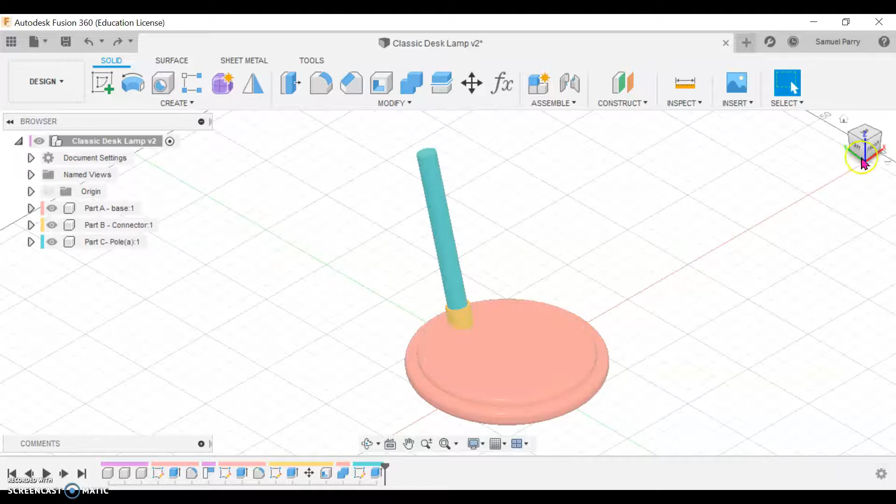So I'm just going to quickly give this a bit of a spin, so you can see where we are up to and what you should have up to now.

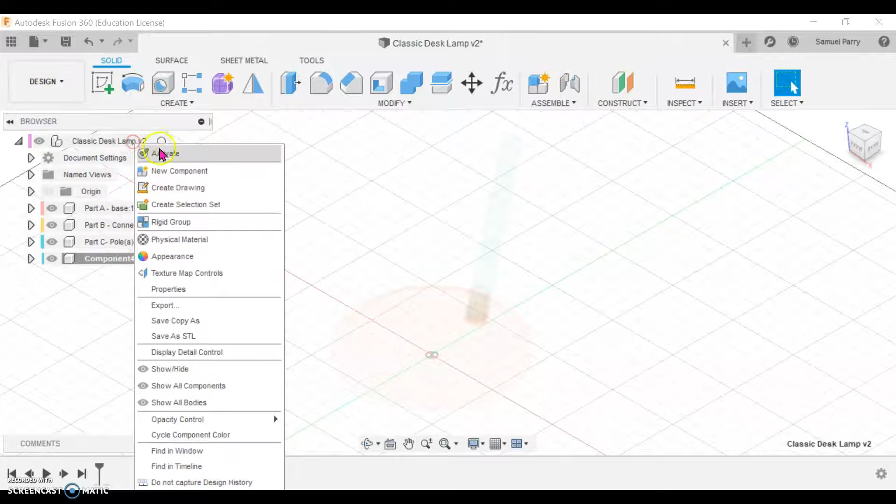And the first thing we're going to do is simply just map out a few more components ready. It's really important that you activate this top part, this top component, which as you can see from this icon is the full assembly of all parts. And then we're going to right click and say new component. We're going to do that again a few times and just map out the next few components.

You can of course do this at the very start before you draw anything, get them all mapped out, but sometimes it's quite nice just to build a few and then map out the next one. So I'm going to double click here now. We'll call this part D, pole B. Just misspelled that, let's go again. Pole B.

This one I'm going to call part E, and that will be the metal bracket, we'll call that. And then part F, we'll call that the lampshade.

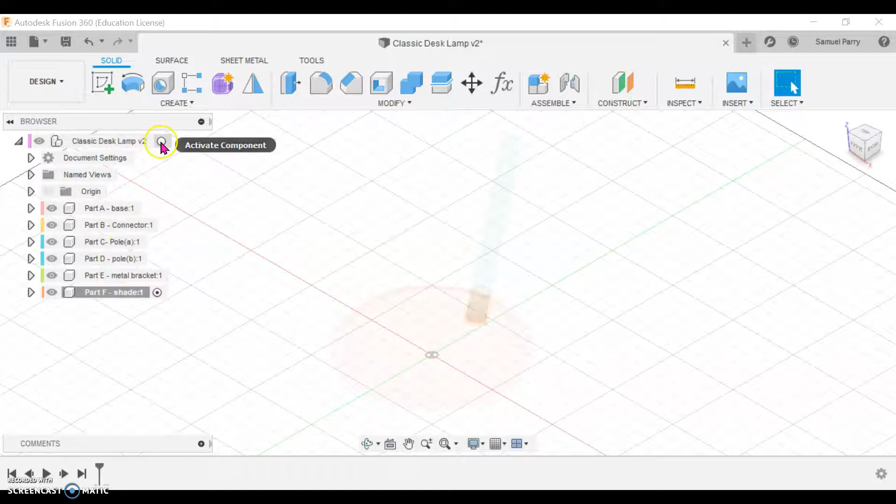Okay, so we've got the rest of our components mapped out now, and they should be clearly here. You shouldn't have any underneath or within any other component there, because we just want to treat all these as separate explicit components. Now, as you can see, we've got our first three components drawn, but we have not yet drawn the others. Now, before we start talking about drawing the next pole, I want to just show you a few things.

First of all, if you are looking at your drawing, this should be angled kind of away from the base. So the tip of this is overhanging in space, if you like, rather than towards. So if you've orientated this in slightly the wrong place, you don't need to worry. You can quickly fix and amend things like that.

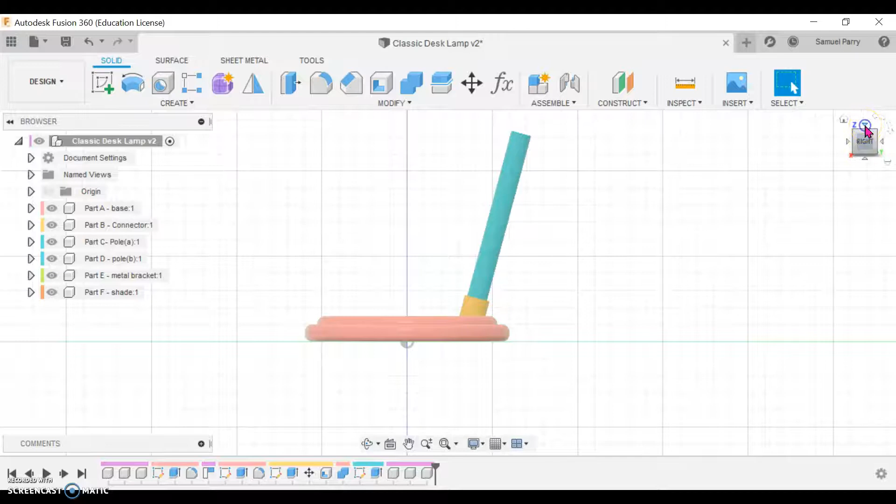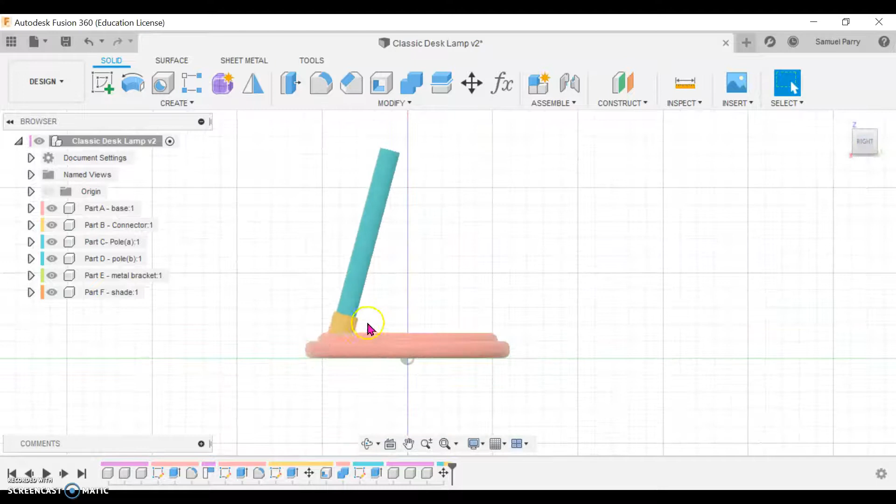So what I'll do is I'll put a top view, and if, for example, yours, we're just going to use the move tool to show you this. We're going to select both of these parts. If you hold the shift key, it allows you to select multiple things. And I'm going to move this. So say you've positioned yours this way around, and when you look at it, it's tilting inwards rather than over the side of the base, and you want to reposition it, you absolutely can.

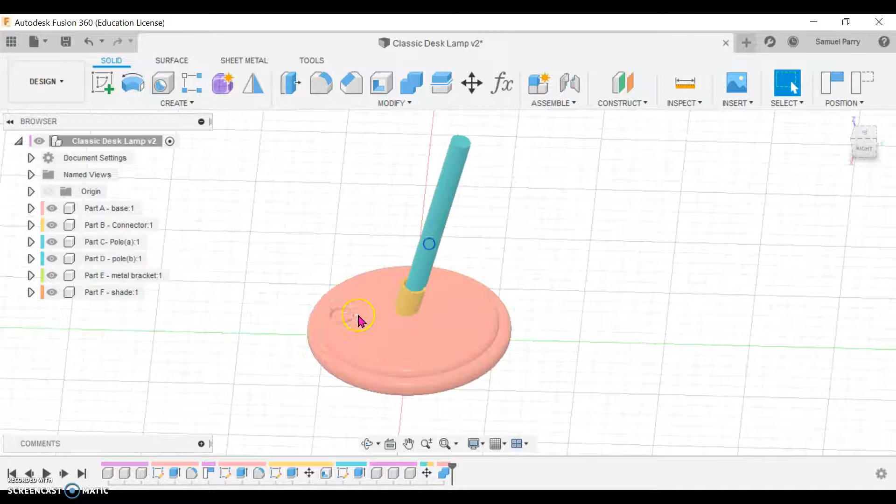So what we'll do is we'll get rid of this. In fact, what I'll do is if you change it, you can change it just as I've done, and then you can move the combine further up and move the move back, and that will actually then update things, so you've still got the hole cut into the right place. So you can still move things around and then update the sequence, the history bar at the bottom, if you need to just amend the positioning thing.

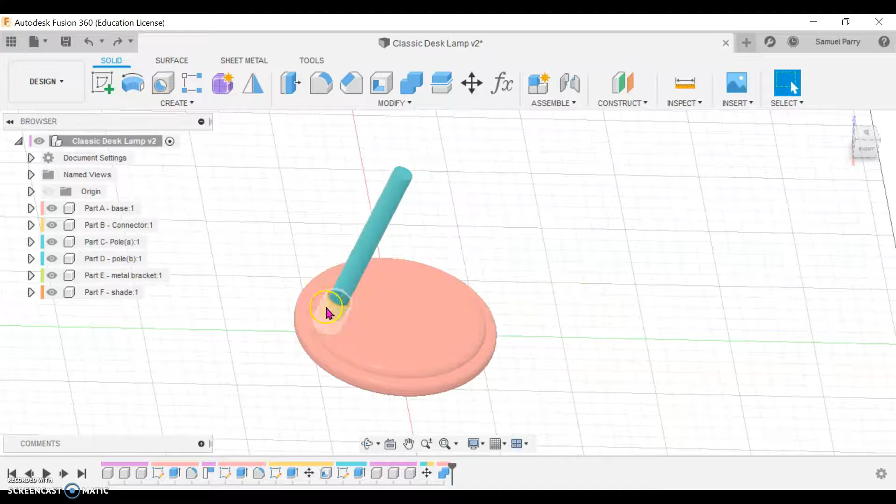Now, admittedly, the positioning isn't very accurate at the moment. We're just doing that visually for now. Later on, we'll look at how we constrain things, but for now, we're just building it visually in that aspect. We're trying to do everything else a bit more accurately, but in terms of the positioning there, we'll look at ways to make that more accurate a little later on. So I'm just going to undo all that because mine was in the right position to begin with. But if yours wasn't quite there, you can easily modify it that way.

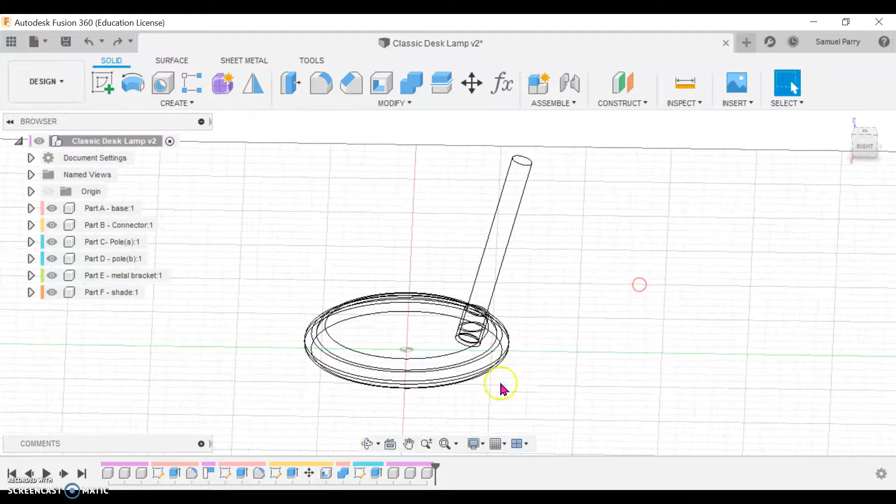Another thing that I find is some students end up having a visual style that can freak them out a little bit. Maybe they've hit a control, tried a shortkey and hit something by mistake. But I've had students have their model look like this before now and find it really confusing when they're trying to extrude and things. So just knowing that the visual style, you can change it into different formats is good to know about. We do that down here.

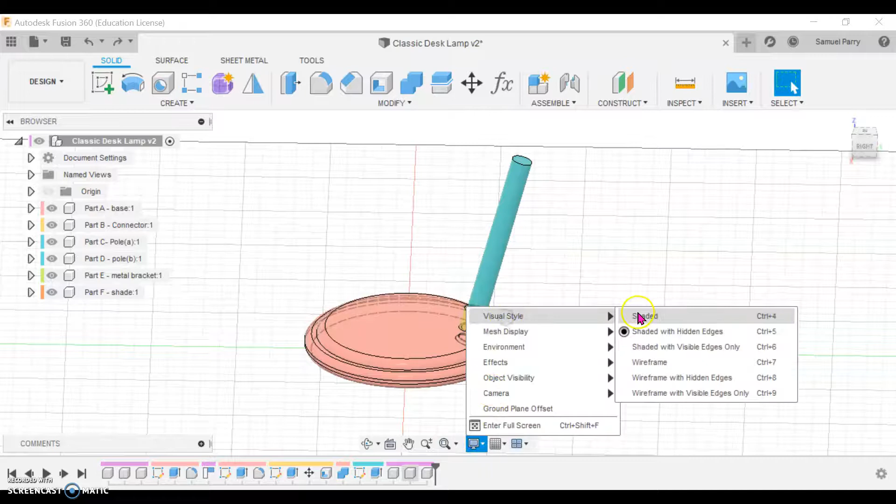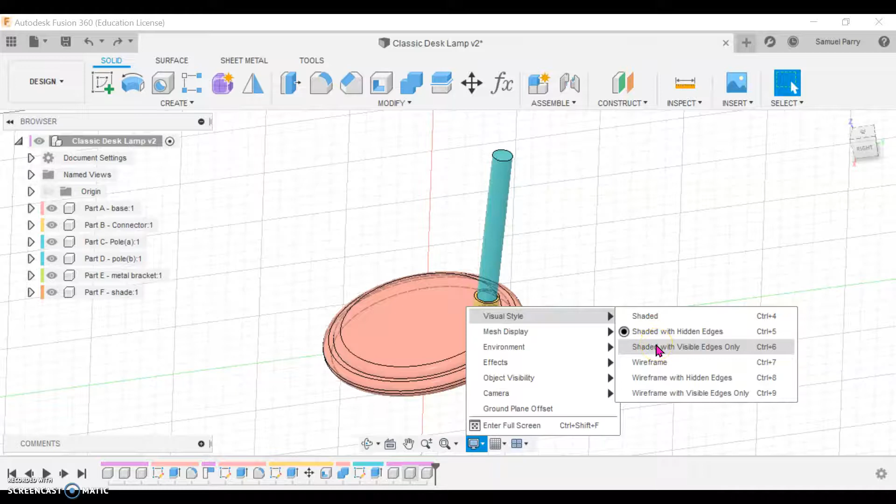The one I always recommend that you stick with, and don't play around with it too much, is... sorry, is visible edges only. I prefer to just work in this one because I can see it a bit more clearly, and that helps me construct the drawing a bit better. So if you have hidden edges, you can see through as well the hidden things. But for me personally, I end up more predominantly using this method or this one. It's totally up to you, but I'm going to continue with visible edges only for the purpose of this.

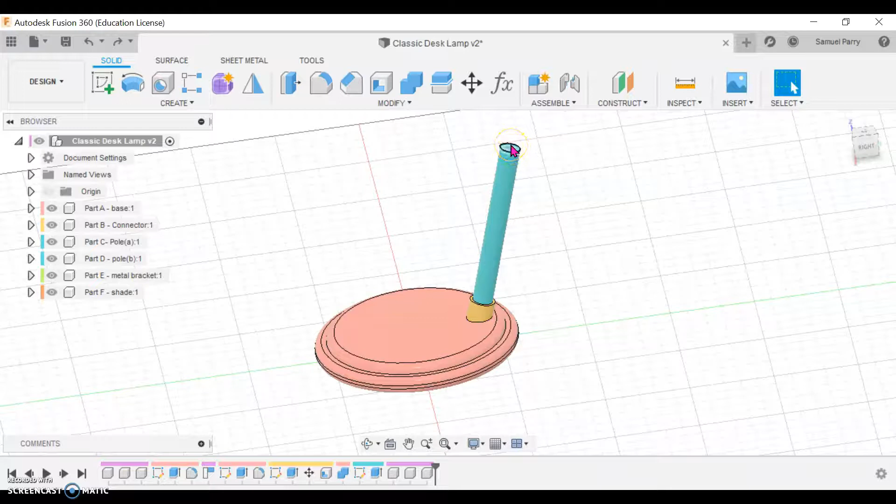Now, with those things said, we're going to draw in our next component. The way we always approach this, as you've seen from building the three previous components, is that we always select a face we want to draw on. When we do that, we're telling the software to put a piece of paper flat on that surface, in that orientation, on that axis. Then we tell it we want to draw a 2D form, and later manipulate it into a 3D form. We'll position the pole just so it's hanging above it, so we can use it in the next tutorial to cut into this pole. We'll talk about that next time, but for now, we're going to build part D.

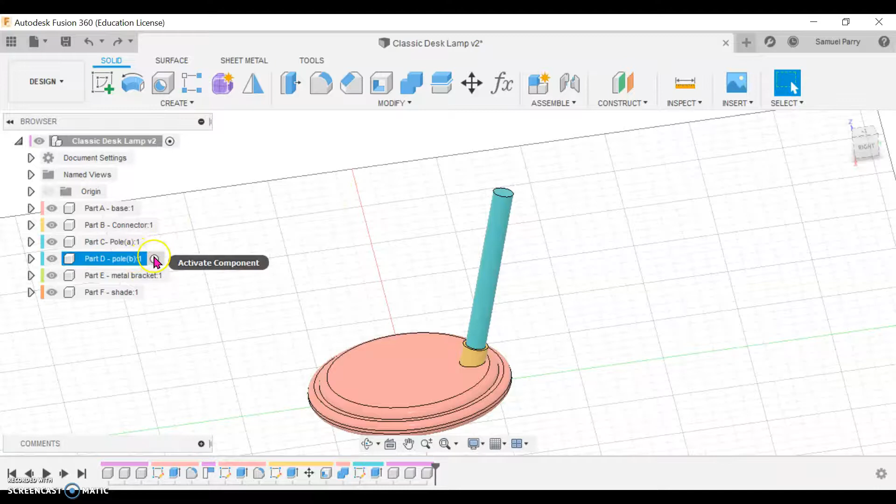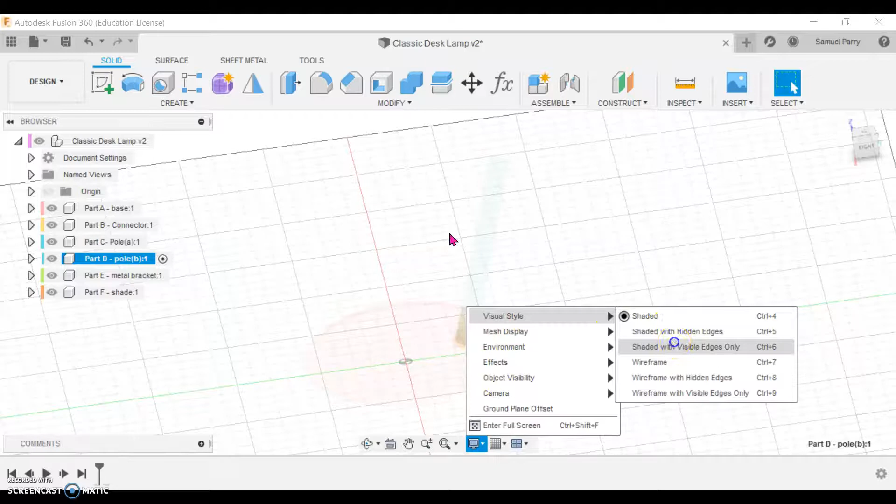I'm going to activate this component. My drawing's going faint, and I find with the lines visible, even when it goes faint, it helps me see things a bit more. Earlier it was a little more difficult to see fully when it was this way around, but if you add visual style with visible edges, you can see things a little clearer.

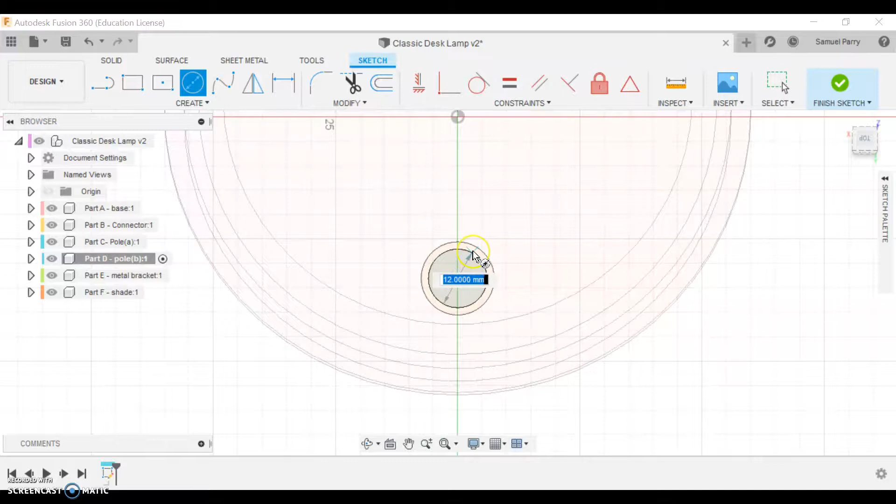So I'm going to create a sketch. You can either click over here or just press the W key, and I'm going to select that face. I'm going to press C for circle, and it's quite nice because Fusion is intuitive - it tries to understand what you're trying to do and locks onto certain things, which really helps. I'm going to draw a circle there, then use the shift button and the roller on my mouse to quickly orientate the view so I can see it in 3D.

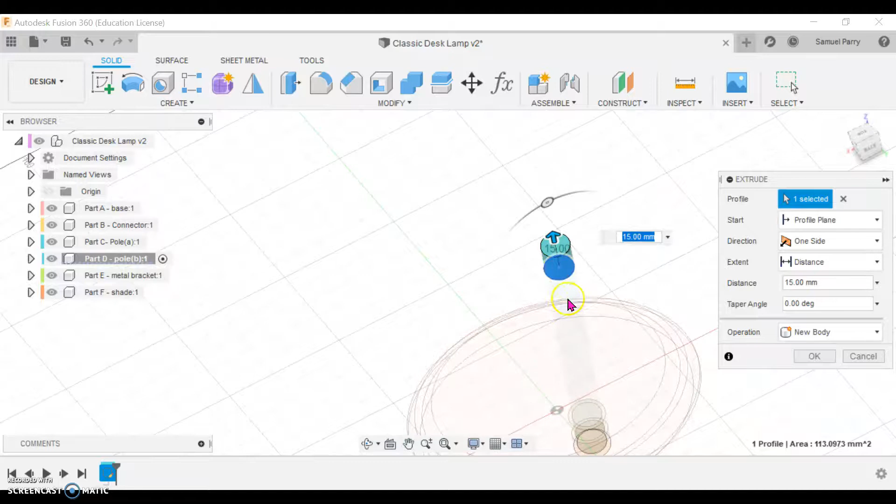Press E for extrude. I'm going to extrude this upwards. Now, I want to make this pole the same length as this pole, but not the full length all the way into the connector - I want it from the top. So if you can't remember the sizes, I'm going to show you another quick tool you can use.

This is currently 70mm. I'll just press OK on that for now. I'm going to activate the whole thing. I want it to be the exact same size as this, but not including the bit that is inside the connector in the base. I want it to be the same size as from here to here.

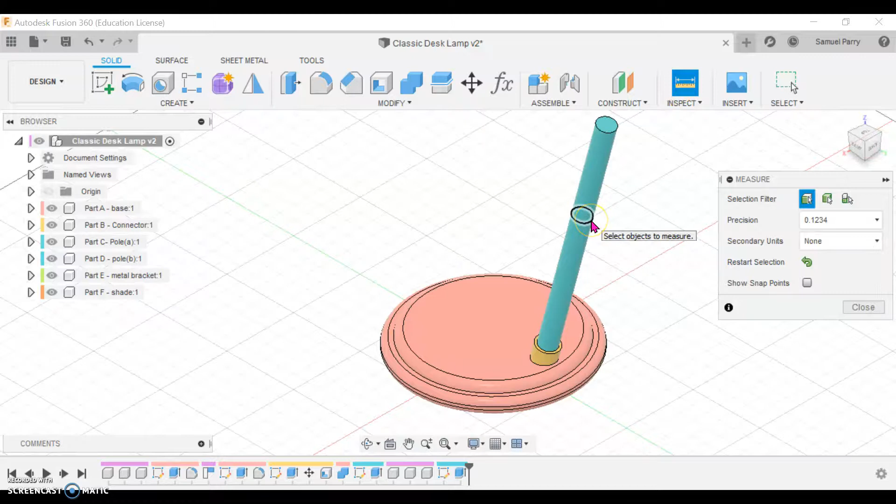Now, a nice quick way you can do that is using the inspect tool. If I press inspect, I can say, okay, what's the distance from there to there? I might have to zoom in, but because I'm using a mouse, it's a lot easier to do that. And it tells me it's 100mm - so you can do a quick inspect on your drawing to find out.

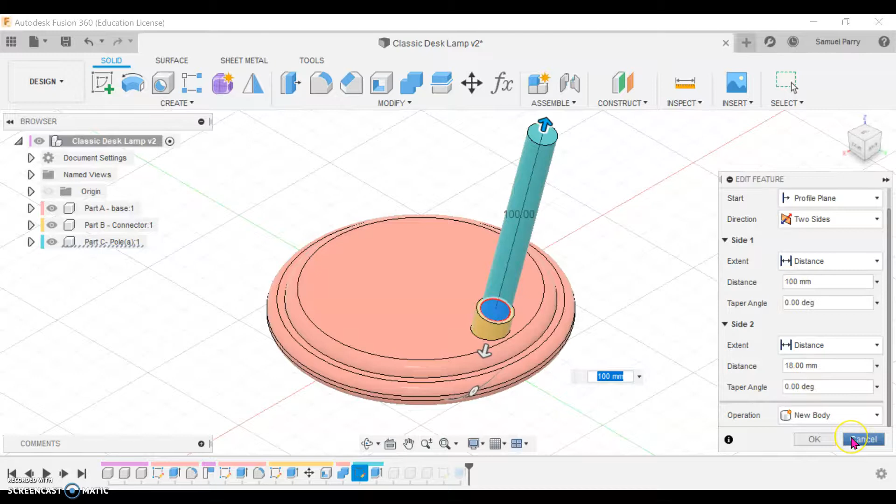Now, you could say you could look at the extrusion, but in this context, if I went back and looked at the extrusion, it's not actually the full size I want, because I want it to be what I can see. If I double click this, you'll see it's probably a bit longer. Scrolling down to the full extrusion - we have 100mm plus 18mm, because we did it both sides. I could have just taken 100mm from there, so that's another way you can do it. But the inspect tool is really useful to know about as well.

So now if I want to update this, I'm just going to say fit, so I can see the whole thing. I can update this extrusion - instead of it being 70, I can say 100. And there we have it. Now this is sat on top of this component, as you can see.

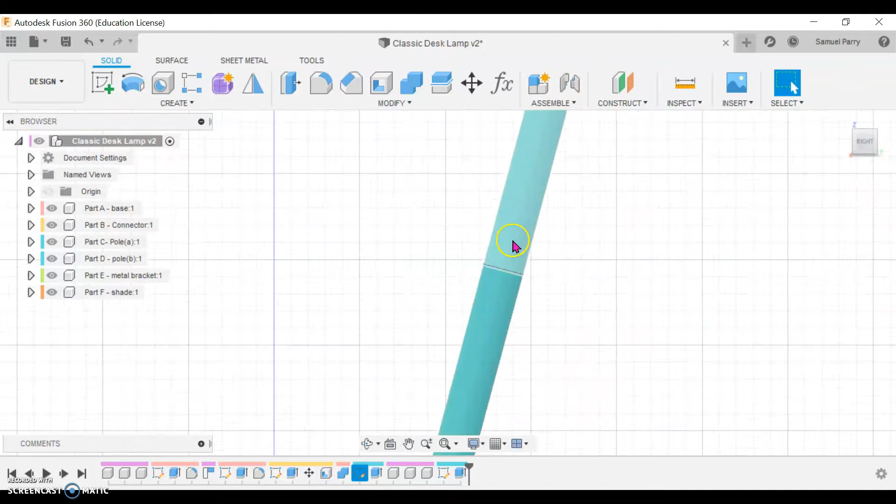What I'm going to do is move this above it, ready for the next tutorial. So I'm going to press escape - it's a good habit to get into, to make sure you're not in any mode or any kind of feature. I'm going to select this part, press M, just move it above for now a little bit, and then press OK.

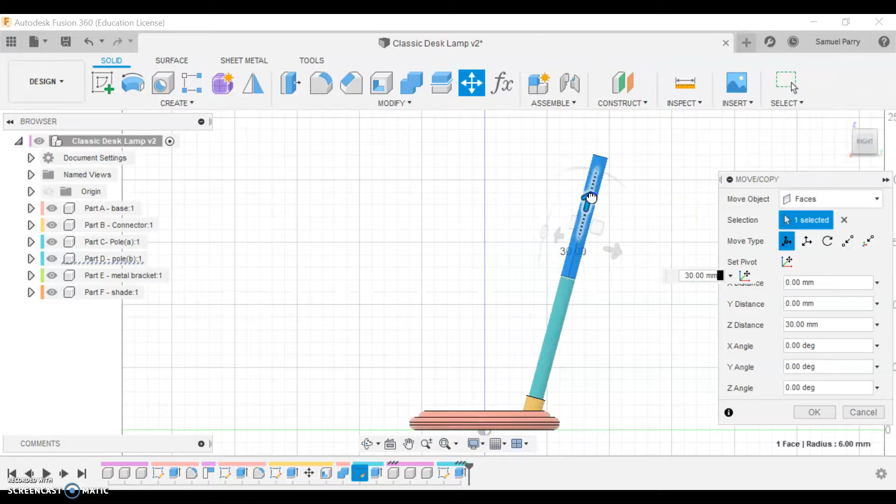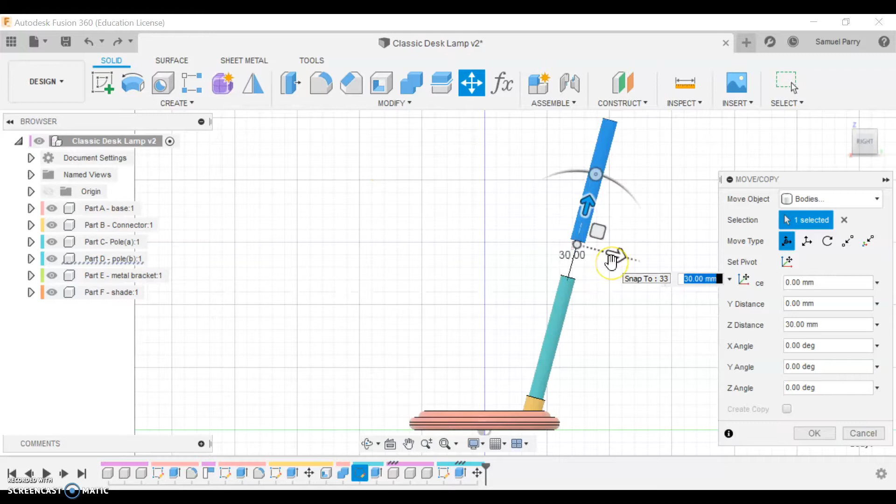Oh, there we go - basically that is the end of this tutorial. I'm just going to redo that last part again: we use the M key, select the component, and move it up out of the way, then press return. About 30mm is fine for now. The reason I'm doing that is because in the next tutorial I want to do something to this face or this one, and having them separated just with that for now will make it a bit easier. So again, it's just another useful tool and another context to quickly use the move tool to get used to using it. Okay, thank you very much, and I hope that was useful.